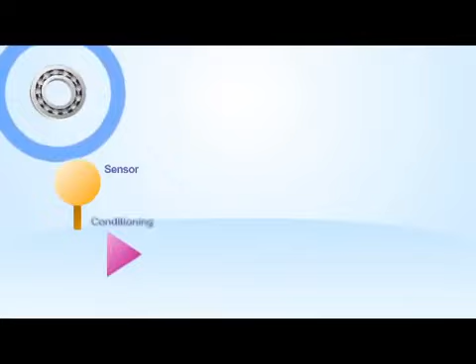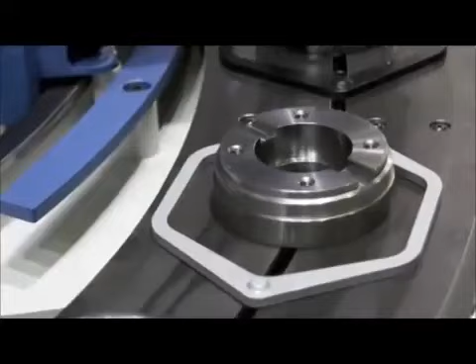Using a sensor to pick up the signal, you can detect this noise, and using signal processing, determine the condition of the bearing. Kittiwake Holroyd's acoustic emission technology has been used on all types of rotating equipment for over 20 years. Using the MHC bearing checker is simple.

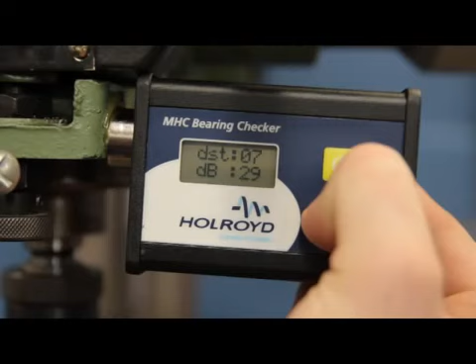With just 2 buttons on the unit and an easy-to-interpret display, measuring the condition of your critical assets' bearings couldn't be simpler. To turn on the MHC bearing checker, push and hold down the power button. To take a reading using the MHC bearing checker, press and hold the measurement button. This starts a 10-second countdown to attach the unit to the machine using the magnetic sensor head.

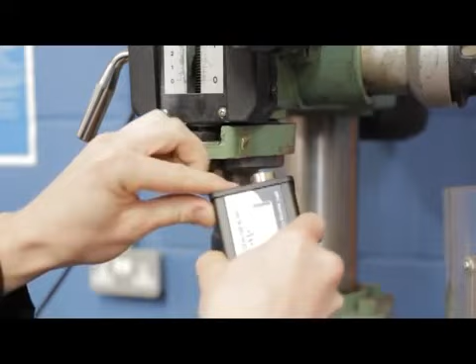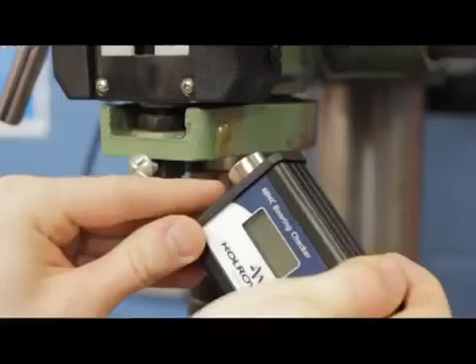Orientation of the unit is not critical, as sound waves travel in all planes. However, joints reduce the amount of sound transmitted through a structure. Ideally, select a point on the machine that is as close to the bearing as possible, but with the fewest joints within the sound path. The sensor should not be placed on loose covers or guards that are not directly connected to the source of the sound.

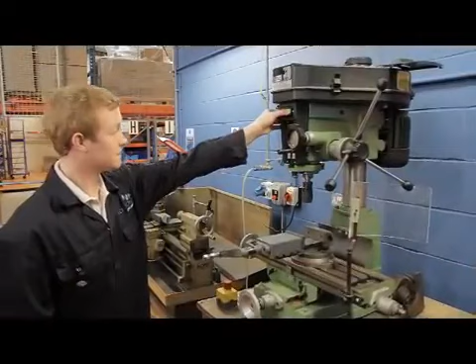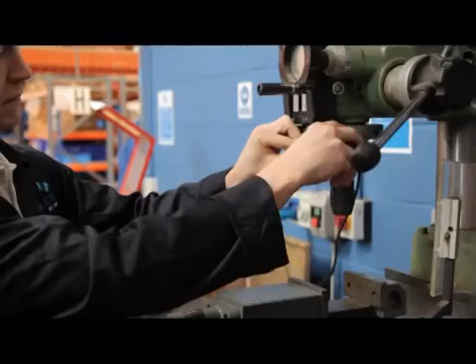To take a measurement, apply a small amount of grease to the measurement point to ensure a good audio coupling. Carefully place the sensor on the measurement point at 45 degrees and, using a rolling action, flatten the sensor onto the test pad or location. Twist the sensor slightly to make sure that good coupling is achieved. Allow the readings on the display to stabilize and then take measurements of distress and decibels.

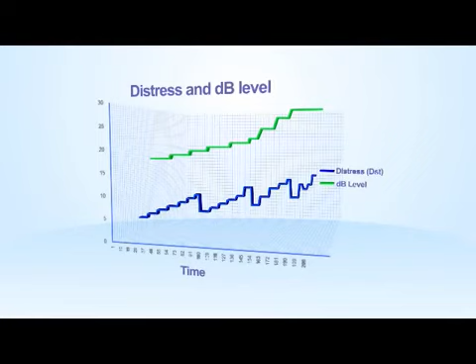Interpretation of data. The MHC bearing checker provides 2 easy-to-interpret parameters, distress and dB level. Distress is a measurement that quantifies the impacts occurring within the rotating element being measured. Even in brand new bearings, impacts will occur.

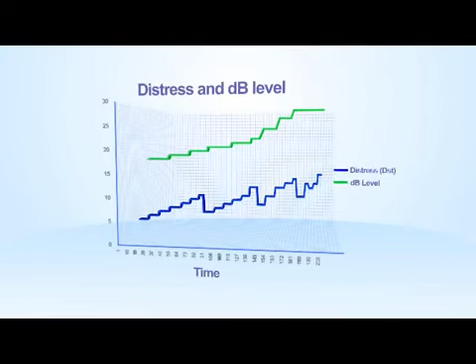The base level for distress would be the perfect bearing, which would theoretically have a distress figure of 0. In real life, bearings usually start their lives with a distress value of 2 or 3. During the life of the bearing, this value trends upwards.

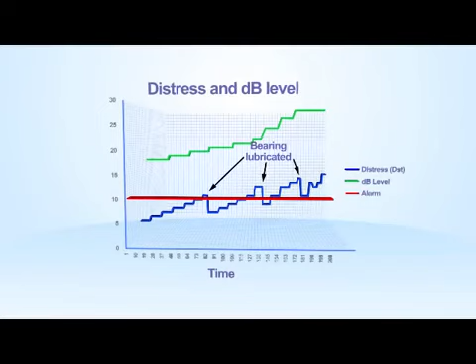Experience over many years has shown that if a bearing shows a distress value in excess of 10, the bearing should be lubricated and the distress value rechecked. If the value of distress remains above 10, then further investigation and possible replacement of the bearing should be considered.

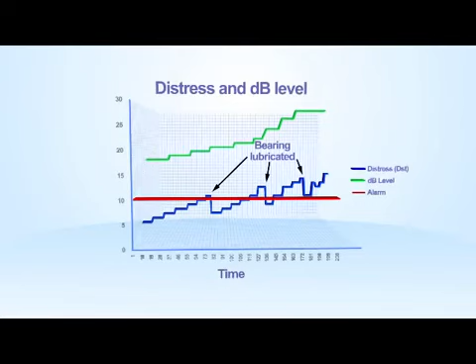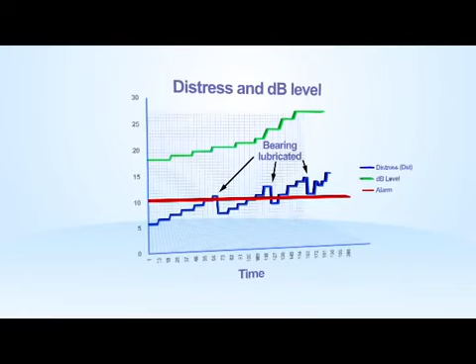dB level quantifies the frictional activity taking place and cannot be easily estimated. The level of decibels is dependent on the speed of the bearing, but only increases as wear increases for the same rotational speed. Usually, the user would take a first reading and trend from that value or compare to a similar machine of similar age doing the same job.

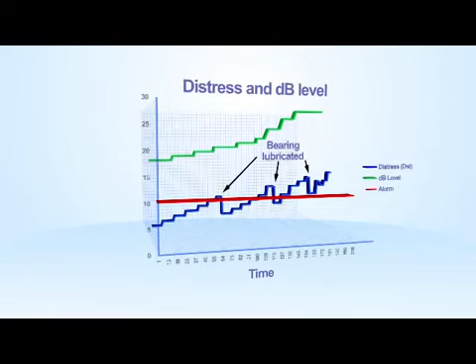By trending this, the user can monitor the speed of degradation. A rapid increase in dB level is normally the final warning prior to bearing failure. As has been shown, using and interpreting the results from the MHC bearing checker is simple.